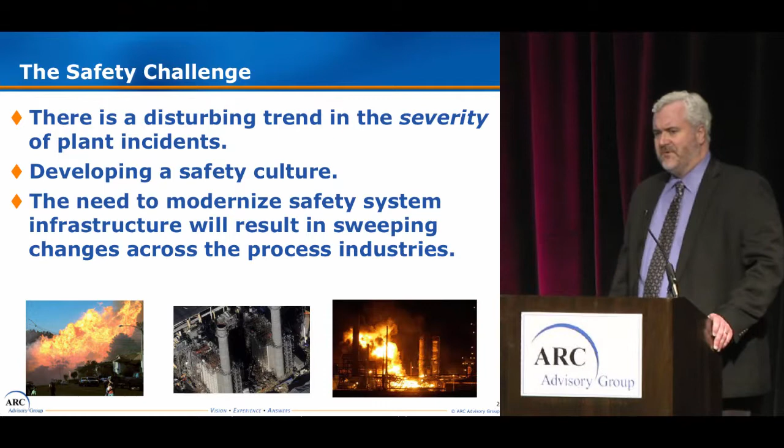The other issue I think we may want to talk about today, and keep this in mind as you're planning your questions for the panel later, is the economic value proposition of process safety. You know, many times it's difficult if you're an end user to approach your management and try and articulate a good economic value proposition for process safety. Of course, mitigating hazards is always a top priority, and saving human life is the top priority.

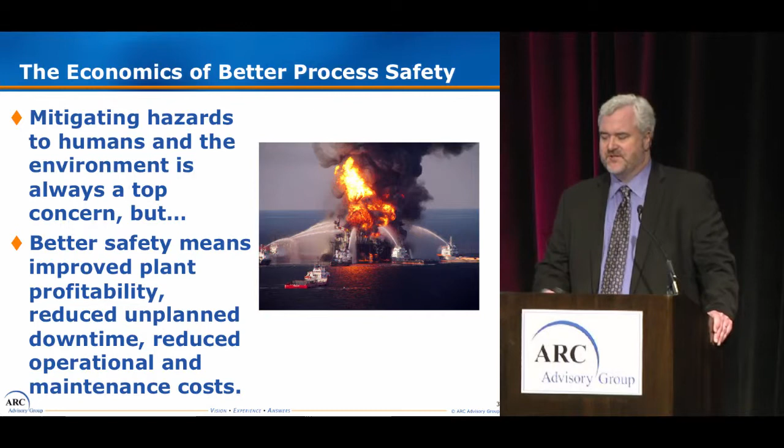But what we found at ARC is that better safety systems also mean improved plant profitability, reduced unplanned downtime, obviously, and reduced operational and maintenance costs. So there are many business benefits that go along with a good process safety strategy as well. And I read a very interesting report recently from this insurance provider called Marsh, and they put out this report that analyzed the 100 largest accidents in the hydrocarbon industry over the past several years. The database goes back to the 70s.

But I found some interesting statistics out of this report, and they say that the combined financial loss from the 100 largest accidents in the hydrocarbon industry has been estimated at over $34 billion. That's a very, very significant figure to me. And each of those 100 incidents exceeded $134 million in value. And the other interesting thing is that the greater concentration of these losses were from 1999 to the present. So like I said before, we may not be seeing a greater frequency of incidents in the industry necessarily, but the incidents that we're seeing are a lot more severe.

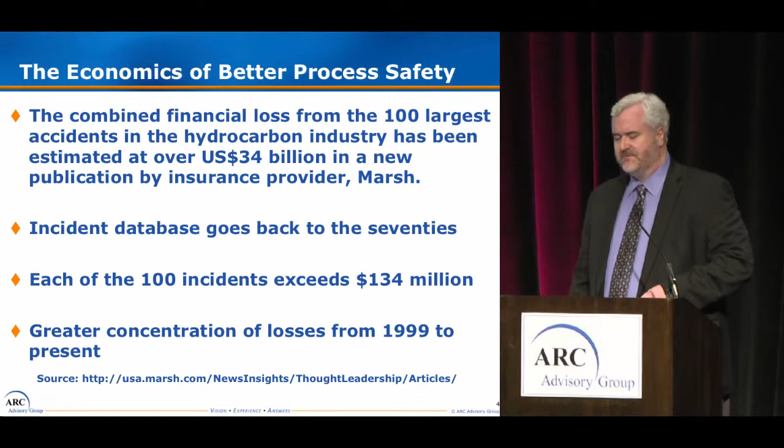So that's very troubling. And of course, we need a better safety system, an overall health, safety, and environment philosophy to address those concerns. And one of the key ways to address those concerns is through better safety standards. And also, I think troubling to us at ARC is that so many people are still very unfamiliar with the ins and outs of the current crop of safety standards that are out there.

And that includes IEC 61508, which is really kind of the umbrella safety standard for manufacturing. And then we have IEC 61511, which I'm sure you've all heard of, which is really the process automation related section of that standard. And we have ISA 84, which is the ISA standard, which is essentially the same as the IEC standards with a few exceptions.

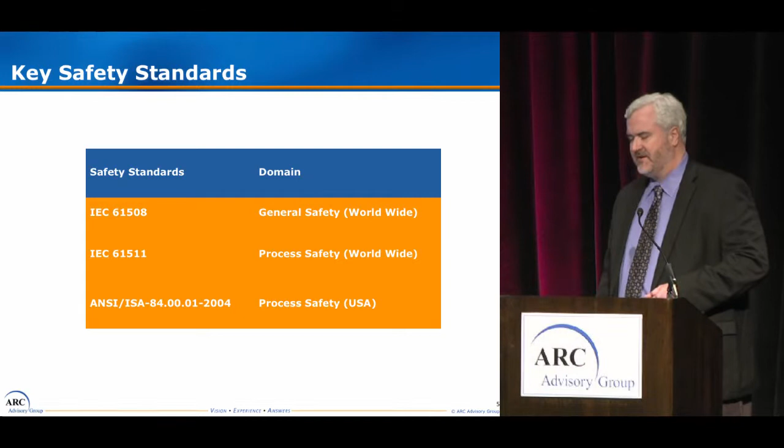And we actually have a very good update on that standard later that we'll talk about. And this is a view of the IEC 61511/ISA 84 life cycle, which is fairly complex, and it requires a lot of engineering effort. One of the things we've seen is that end users, as I'm sure you know, are challenged and restricted in terms of the amount of qualified personnel that they have to do some of these complex tasks that are associated with safety engineering. And they're looking to some other people for help, such as the automation suppliers and systems integrators. And we'll talk about this life cycle as well.

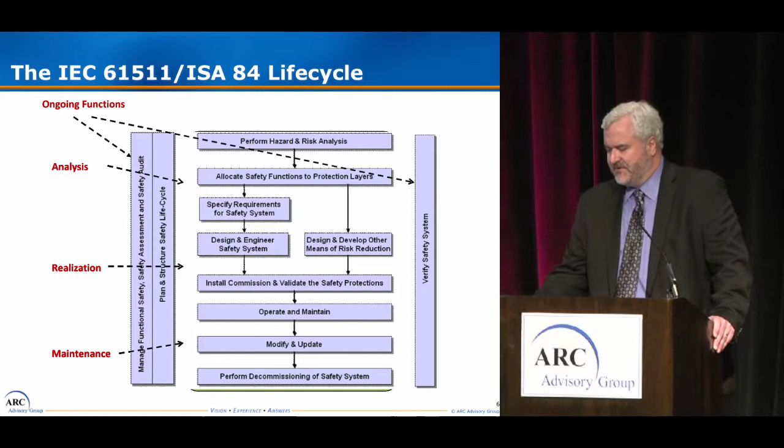Migration, as I mentioned before, there's a lot of very old safety systems out there that need to be migrated, just as there are DCSs. A few years ago, ARC did a study, and we determined that there's $65 billion worth of process automation systems that need to be modernized in some way, and they've essentially reached the end of their useful life. I think there's lots of safety systems out there right now that need to be modernized as well. And even if you consider that safety systems are just 12% of that DCS number, you still have an $8 billion figure of systems that need to be modernized.

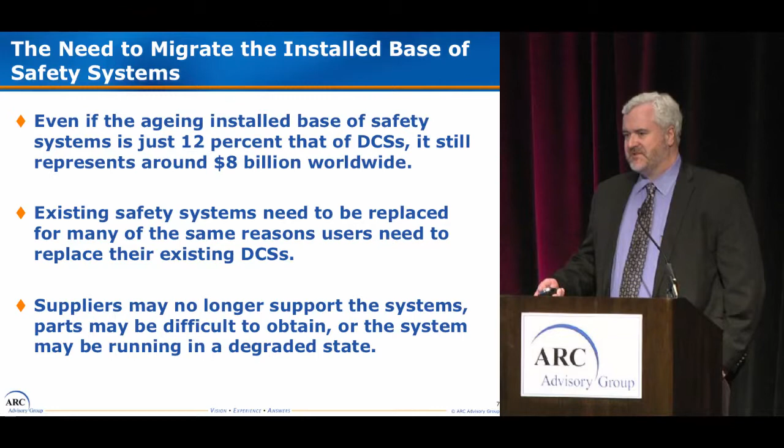And in that figure, I don't even think we're including things like the old relay-based systems, where I actually had one end user in the hydrocarbon industry describe to me the current state of the old relay-based systems as being brittle. Nobody even wants to touch those. And the thing is, once you do touch those old systems, according to the standard, you pretty much have to replace the whole system. So it can be kind of a daunting task because when you're replacing process control systems, you can do that piecemeal if you want to, right? You can do a phased migration and change your HMI and change your controllers in a phased manner. But you can't do that with a safety system. You have to change the whole system, and in many cases, the safety devices as well. So it's really an entire system replacement.

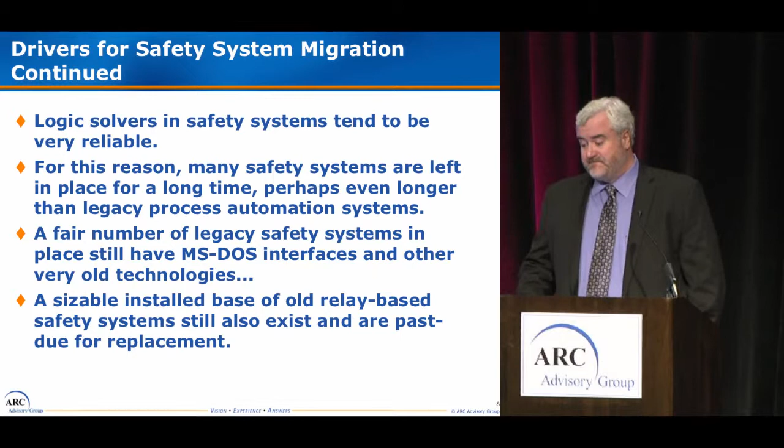And one other word, I'll just skip over these slides. I think we might want to talk during the panel discussion about the increasing role of devices in safety systems. One of the things we found in our research is that it's not very often that the logic solver in the safety system fails, right? If you're going to have a safety system failure, it's more likely to be one of the devices, or even more likely to be a valve, a final element that's going to fail in your system. So we do see a need for a better view into what's happening in those SIS devices. And I think our current crop of intelligent devices and diagnostic capabilities and so forth might give us a better window into what's happening there.

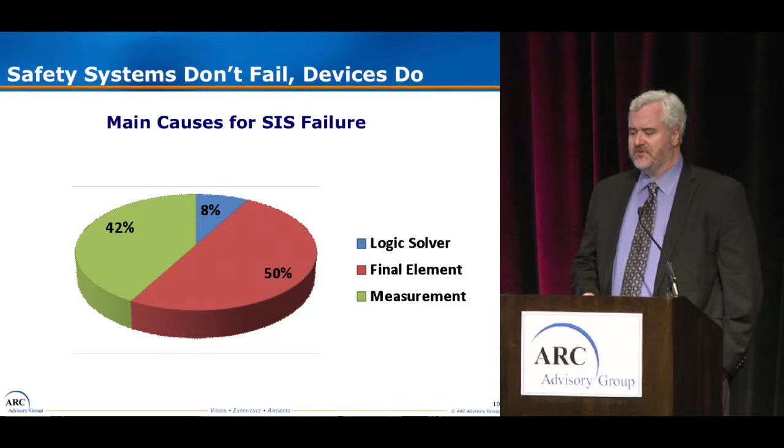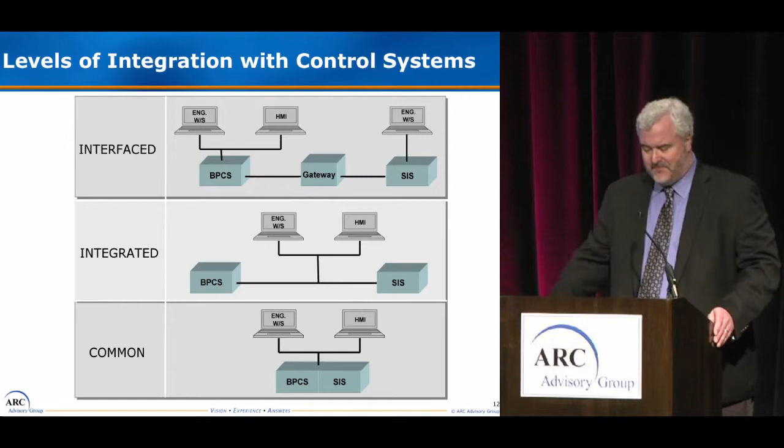And then we have sort of the more extreme end of the spectrum where it's completely common. You may have a BPCS controller and a safety controller kind of in the same chassis or the same environment. But I'm not going to go into detail with that right now. I think we have some experts up here that are a lot more qualified than I am to talk about these various levels of integration and their advantages and disadvantages.